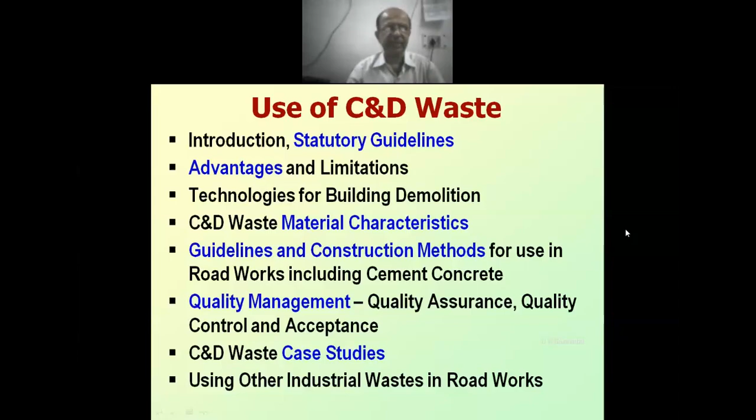Quality management: when we use this C&D waste, what type of quality control tests we have to do, how to ensure that whatever road we have constructed using C&D waste is of very good quality. So those issues will be covered. Then some case studies I will be discussing, and then, as I told, towards the end, some other industrial wastes, etc., which are not being covered in these presentations. So that I will be discussing.

Now coming to the first point, importance of using waste and locally available marginal materials, including C&D waste. Of course, there are these two terms. One is waste material, and another is locally available or marginal material. Waste material we normally refer to industrial waste. There are agricultural wastes also, like rice husk ash. That also has been tried as surkhi, as a lime replacement material. But of course, the quantum of generation is not so much as compared to industrial waste materials.

So C&D is also an industrial waste material because construction is also an industry. Many times we say construction industry, road construction industry. So that is also an industry. The waste material produced by any industry, the reject material produced by any industry, is called waste material. And locally available mainly refers to materials which don't have very acceptable properties with regard to road construction. That's the difference between waste and locally available material. But many a times we use them as synonyms, and many a times both will be the same also.

But for example, laterite is there, or slate stone is there. Laterite is available in plenty in coastal areas. This is a softer type of aggregate material. Slate is not very soft; slate is a very hard stone. But the problem with slate is that it comes in layers, so its flakiness index will be very high. So those things are considered locally available or marginal materials, which are naturally available. But waste is definitely a byproduct or reject material of an industry. So C&D is also a waste material.

At least for fly ash, right now we have very good estimates of how much is produced, and for steel slag, copper slag and other types of industrial waste also, because those are generated by specific industries. So if we ask the industries, they will be able to give the data, and that data is collected and collated and summarized, and we can calculate the total generation of fly ash or steel slag or whatever type of industrial waste is there countrywide.

But unfortunately, construction industry is very spread out, spread out all over the area. Who is demolishing his building today and who will demolish tomorrow, that is not sure. Municipal authorities will be knowing, but exactly even they don't have the exact data regarding the C&D waste. So that is the problem, and countrywide, how much of this C&D waste is generated, we don't have - only estimates are there.

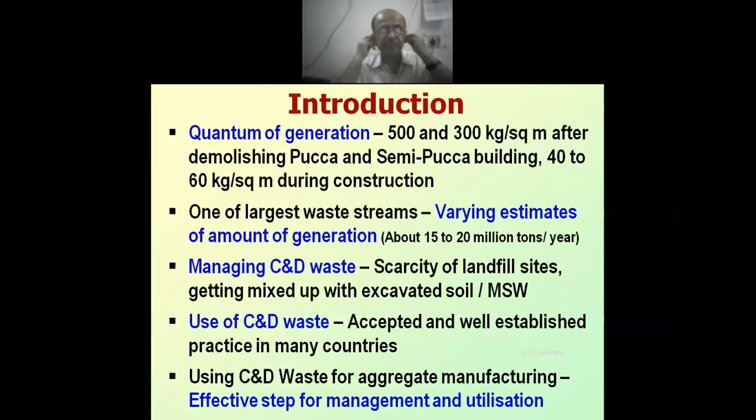Now, how much per year all over India is generated? There are different estimates. One estimate I have written here. In Delhi, around 3 to 4,000 tons per day is generated, that's what they calculated.

Managing C&D waste, you can refer to the CPCB and other guidelines. They will give approximate estimates of C&D waste. Managing C&D waste involves addressing the scarcity of landfill sites in many countries.

Actually, unfortunately in our country, not only C&D waste, using any waste material in road works or building works is not immediately accepted. As soon as you suggest to use fly ash, slag, or C&D waste, the PIO or the concerned engineer will say, what is this? How did we construct it before? How will our road be of good quality? Why are you forcing us to use this kind of material? These kinds of questions will arise. This is very unfortunate, actually.

Otherwise, if we look worldwide, even the advanced countries of Europe and America, it is already an established practice to use this kind of byproduct. They don't call it waste material at all, they call it industrial byproduct material. We can consider the European countries as world leaders for using this kind of waste or byproduct material, including C&D waste. Using C&D waste for aggregate manufacturing is an effective step for its management and utilization.

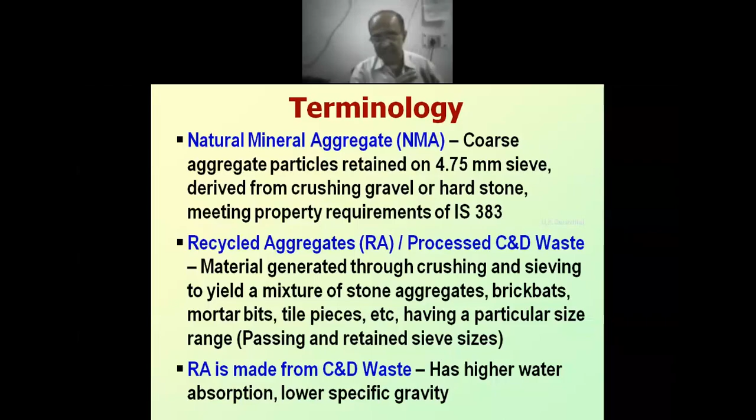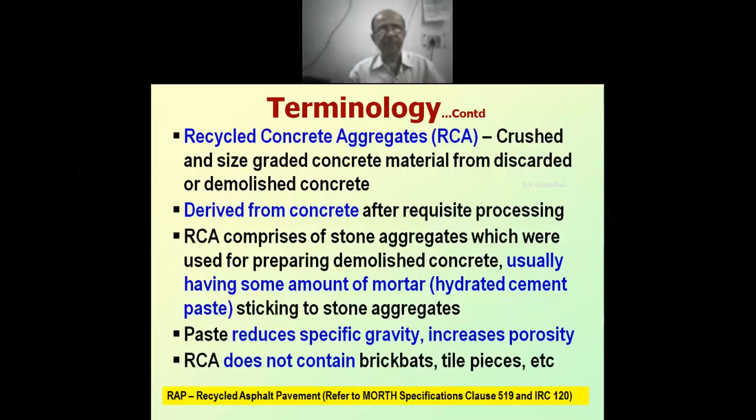Now coming to statutory guidelines, what do our statutory guidelines say regarding the use of C&D waste? The C&D Waste Management Rules 2016, issued by the Ministry of Environment, Forest and Climate Change, Government of India, vide notification dated March 2016. I told you about the earlier gazette notification, which was issued way back in the 1990s.

Then of course the revised versions also have come. These C&D waste guidelines were notified; it is called the C&D Waste Management Rules 2016. It was notified in 2016. So the application is waste resulting from construction, remodeling, repair and demolition of any civil structure generating C&D waste. So these guidelines are applicable to all those places where C&D waste is generated.

So what does this guideline mainly contain? It tells with regard to bulk generators and municipal authorities what their obligations are, in what way, what they are supposed to do. Duties of the bulk waste generator. Bulk waste generator means bulk C&D generator, more than 20 tons per day.

So if you are constructing a small residential building, this is not applicable. Only when buildings are demolished and this much amount of waste is generated per day, this is per building and this is per project. So then only it is termed as bulk waste generator. If he is not a bulk waste generator, what should he do? The guidelines say that he must take that C&D waste and deposit it in designated C&D collection points.

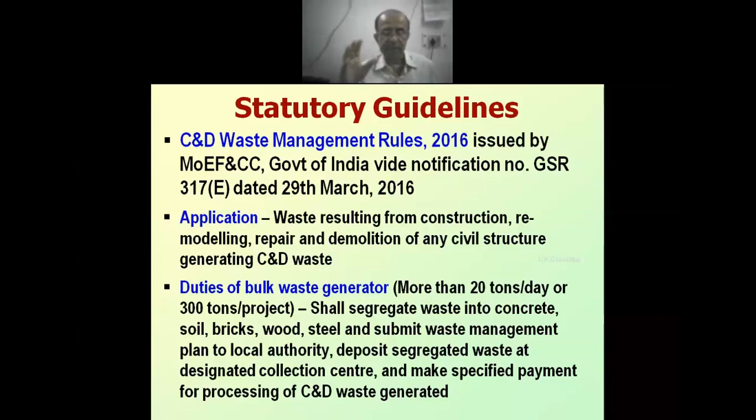And then whatever material remains after reusing, he should submit it to the designated authorities. And of course, the authorities will charge for collecting his waste material and processing it, so he has to make that payment. Now, what are the obligations of the local authorities? The local authorities shall get the waste from the collection center, transport it for processing, devise measures for management of C&D waste, including processing facility, provide incentives for using the material from C&D waste such as non-structural concrete, paving blocks, lower layers of the road pavement, colony and rural roads.

So the authorities are obliged to have some methodology for collecting, transporting and processing this C&D waste collected at the collection center, and then they should set up the processing plants. And not only processing and making reusable articles, they must subsidize. They themselves must use those kinds of products: non-structural concrete, paving blocks, and roadworks also. That means municipalities who are constructing the roads are obliged to use the C&D waste generated in that municipality in their roadworks.

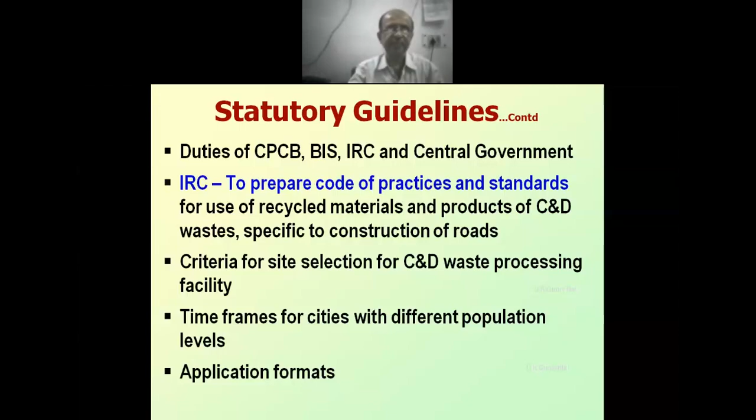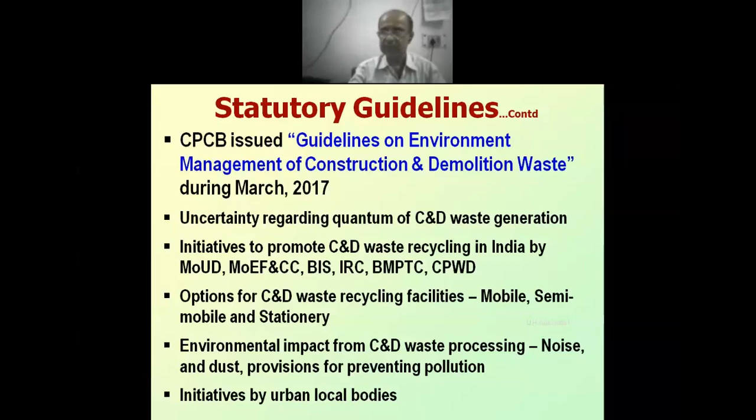In what way? Actually, people demolish a building and they will not know where to dump it, because you just cannot dump it in the municipal solid waste (MSW) dustbins. So what do they do? They fill up the truck. They wait till night. So during the night, they go just like thieves.

They will be looking for where they can dump that C&D waste, and mostly it will be in the vacant plots where buildings have not been constructed as yet. It will be filled up with C&D waste. City outskirts, roadside. This is also another very big, very problematic area.

You are hearing about urban flooding. Since the last few years, we are hearing about urban flooding. Urban flooding was there in Mumbai, on a very large scale, and very unfortunate. It happened a few years back. Then urban flooding was there in Chennai, and now urban flooding has happened in Bangalore. We are all seeing those videos in newspapers and the like.

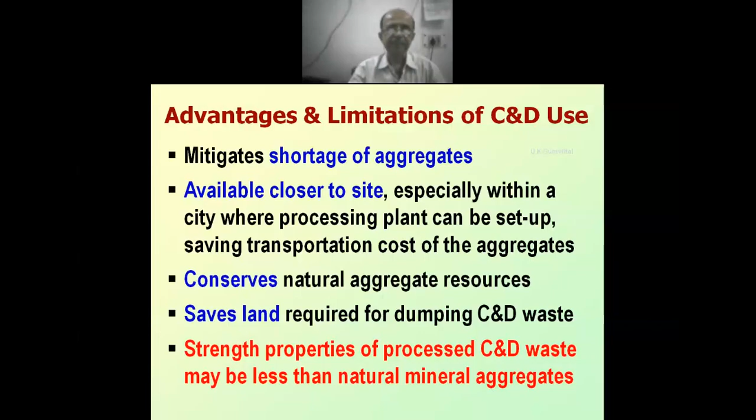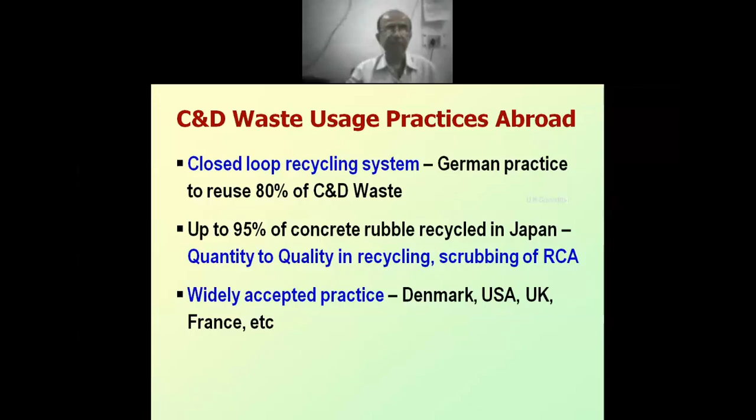It's a widely accepted practice in many countries in Europe and America, like Denmark, USA, UK, France, etc. The international specification, the European code EN 12620, allows recycled aggregates in concrete, recycled aggregates being processing of inorganic material previously used in construction. RCA can be up to 90% and RA can be up to 50% in concrete.

So RCA and RA are entirely different terms. I already told you RCA is derived exclusively by crushing concrete. RA is derived by crushing C&D waste. That means RA can have concrete, brick bats, tile pieces, etc. So that's why RA will be more heterogeneous and can be used up to 50% replacement, whereas RCA can be used up to 90% replacement of natural mineral aggregate as per EN 12620. Even we don't allow that much. What does BS 8500, the British code, say?

RCA can be used in structural concrete having compressive strength up to 50 MPa. Up to 50 MPa concrete we can use RCA. Mortar to be less than 5% in RCA. If the mortar is more, usage is limited to 20%. No limits for the mortar content in RA. Of course, RA we cannot use in very high strength concrete. RA we can use in the mass concreting or concrete having a lower strength.

And the extent of use of RCA also depends upon the amount of coating. That of course you will have to judge visually. If the amount of coating is more, we can use up to 20%. Otherwise, the code DIN 1045, what does it say? It says that up to 25% RCA can be used in this German code. Up to 25% RCA can be used in structural concrete of strength up to 30 MPa in the dry or low humidity condition.

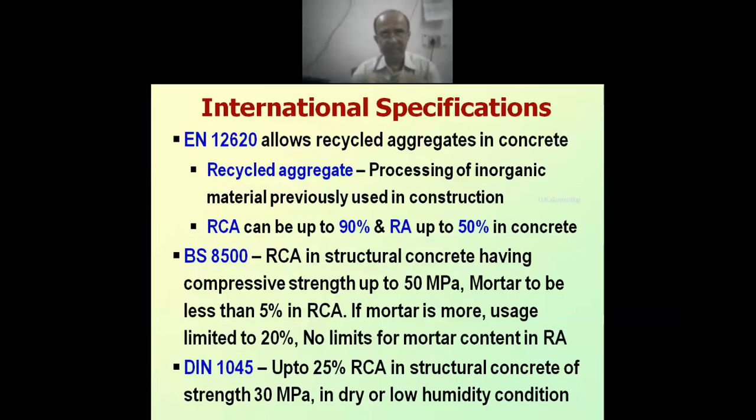And in such conditions, we can use RCA up to 25% in up to 30 MPa concrete. That's what they have specified. Because if you use RCA, the RCA will have a higher water absorption capacity. So if it is used in a humid condition, it will absorb more water, and more water means more degradation of the concrete. So that's the idea.

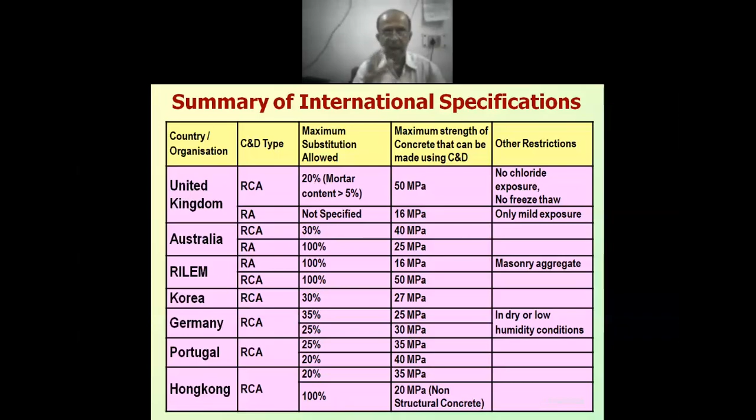Now, coming to some important points with regard to demolition technologies. What is demolition? Demolition is destruction, breaking down, dismantling, destroying a structure after its service life by pre-planned and controlled methods. This is very important. Whatever structure we construct has a particular service life. A flexible pavement usually will have a service life of 10 to 15 years, and cement concrete pavement maybe 25, 30 years.

In a similar manner, a building may have a service life of 50 years, 70 years. Of course, there are buildings which are centuries old and still people are using them and they are in good condition. That's a different aspect. But normally, the building life is considered about 70 years or a maximum of 100 years. After that service life is over, either we go for major rehabilitation of that building, or many times we demolish that building and construct a new one. So this demolition, as we already know, results in C&D waste generation.

Demolition can be done by two methods. One is manual demolition, which is a widely used technique. It's labor based.

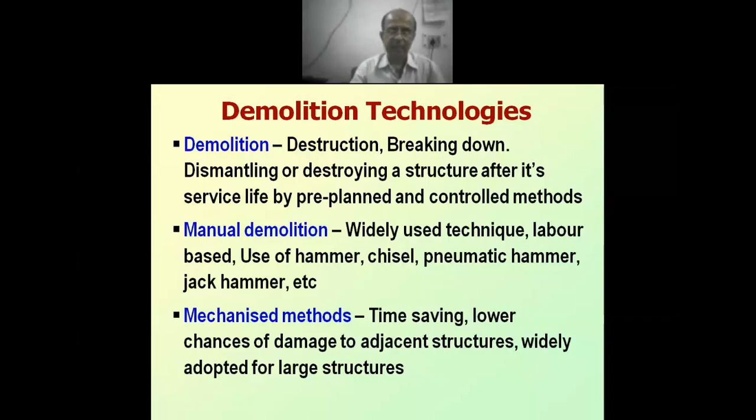there we adopt mechanized methods. So what are these mechanized methods? The first and foremost is the wrecking ball. It's an iron ball, hung from a crane.

When the crane swings, it swings in such a manner that the ball hits the building with great force, just like a hammer, but a very big hammer. So it hits the building and the building is demolished.

The ball, weighing up to 6 tons, is suspended from the crane and either dropped or swung into the structure, crushing the building. The ball weight can be up to 6 tons, suspended from the crane, and it can either be dropped or swung so that it hits the building and demolishes or crushes it.

The disadvantage is straightforward: a highly skilled operator is a must, because the ball is usually used by swinging. During that swinging, when it goes back, it should not hit other buildings. And even when it is hitting the intended building, it must hit with a particular force. That force should not be very high.

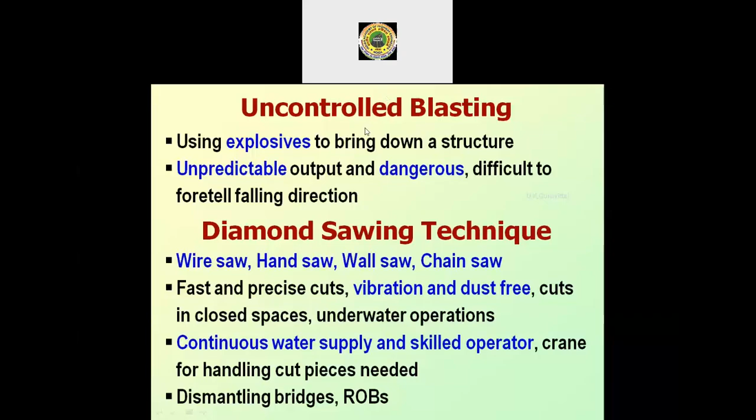Hope you are all there, now you have come back. So we were discussing the use of C&D waste and the different demolition methods. I will continue with the properties of C&D waste, the other demolition methods, in what way this material can be used, and the case studies.

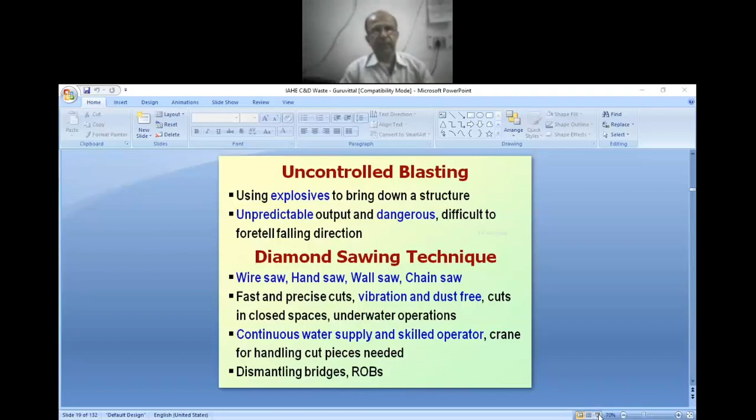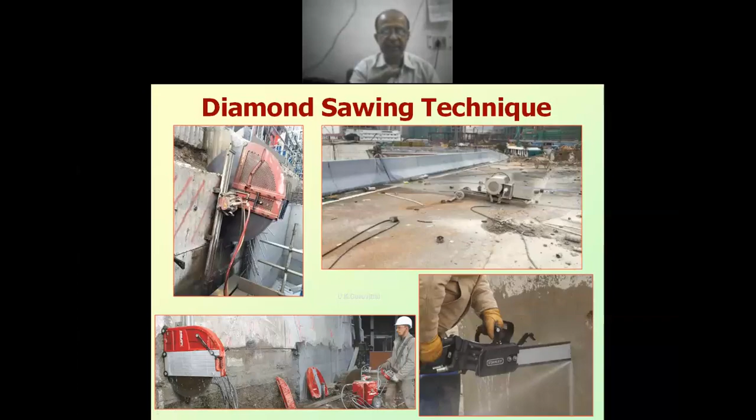This is the diamond sawing technique using hand sawing. These are smaller ones, and this is a little bit bigger one. They are sawing off, cutting off the bridge structure like that. So this is a very versatile equipment, but the only problem is that it requires a continuous water supply.

Now, the next important technique is implosion. Everyone in India would be aware of implosion because of what they did to the Supertech Twin Towers in Noida. Very tall structures were there, and using this implosion technique, they brought down that entire structure within seconds, within 9 seconds. What is implosion? Implosion is using explosives to knock down the columns so that the building collapses, done by the Firm for Controlled Demolition Inc. of USA.

This has been widely discussed in the press and TV. The columns are demolished in a systematic, controlled manner, one by one, by tying explosives, maybe TNT or dynamite. TNT is the usual one they use. The sequencing of the blasting is calculated and decided so that the building collapses within itself. That is known as implosion. Placement of explosives and sequence of detonation are critical. The building is demolished in a few seconds. It is suited for high-rise buildings, and the fall and scatter of debris is controlled. The two towers were very nearby, just 9 meters away, and the other tower suffered absolutely no harm, except for the dust.

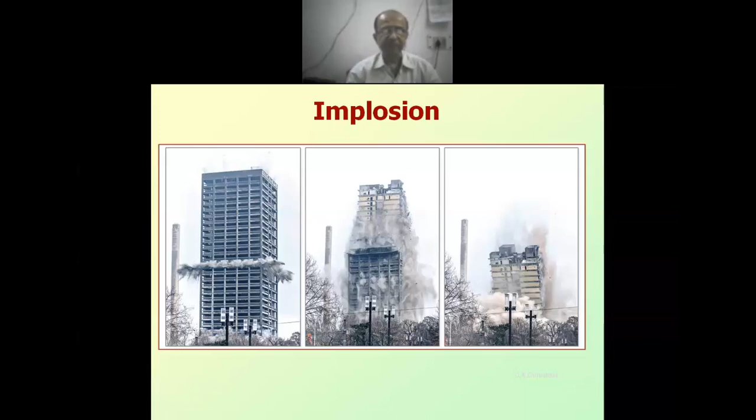So here are some photographs of the implosion of other buildings. This also will be very quick. Not only the Supertech towers, it happened earlier also in Cochin, within the coastal regulation zone very near the sea. They had constructed similar kinds of residential building structures, and they were also demolished in the same manner.

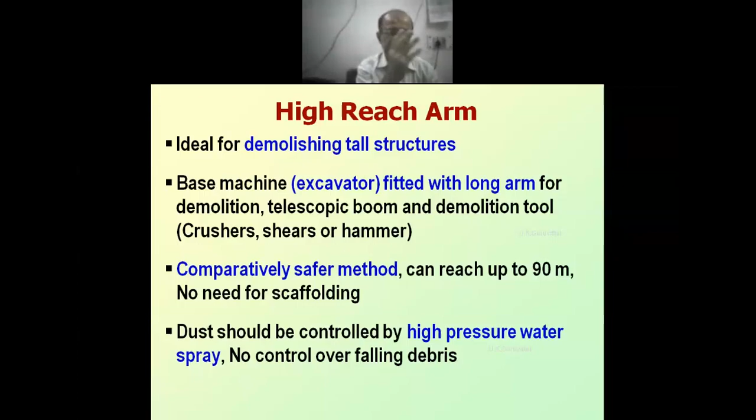The next technique can be a high reach arm, which is ideally suited for demolishing tall structures. This high reach arm has a base machine, an excavator fitted with a long telescopic boom for demolition, and demolition tools can be either a hammer, a crusher, or shears, operated in a similar manner.

It is similar to the swinging ball, but the swinging ball's swing is uncontrolled. This high reach arm is very much under the control of the operator. Since there is no swinging ball, it is a comparatively safer method and can reach up to 90 meters.

No need for scaffolding. Dust should be controlled by high pressure water spray. There is no control over falling debris, which can fall a little bit away also, so that is the problem. Of course, dust nuisance will always be there. So this is the high reach arm.

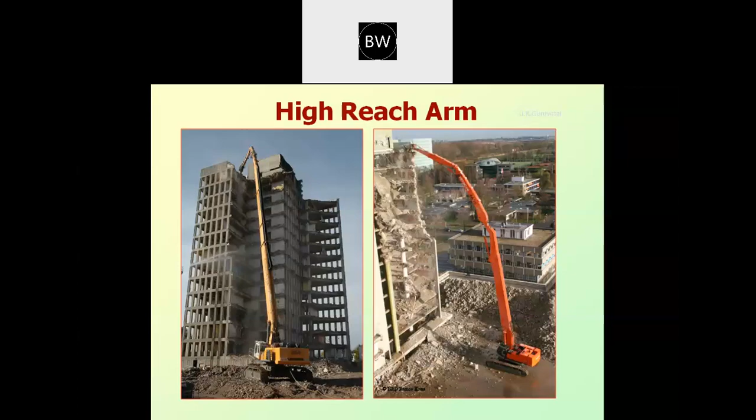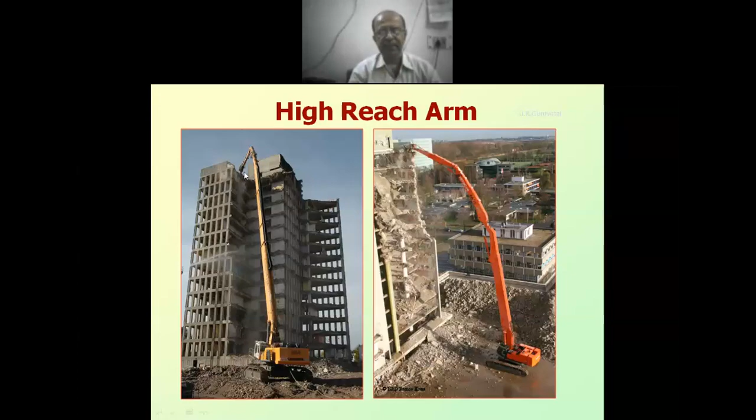So this high reach arm, you can see in the photographs, is having the base crawler. Then to that they have attached either a hammer type or a shear type attachment, like that.

Concrete crushers and bursters operate by applying pressure. It can be used for small jobs in narrow, inaccessible areas. It cannot cut steel rods and needs water spraying. Not suitable for tall buildings, and it has low output.

Then hydraulic splitters can also be used exclusively for cutting concrete. The burster is similar to this splitter.

Then coming to pavement breakers and rubbleizers, I already told you with regard to RAP, which is exclusively for asphaltic or bituminous pavement. But in many places, we have cement concrete pavement also. Cement concrete has a longer life, 40 to 50 years. After that, if it is too much under distress, we may not be able to provide an overlay over that, and it has to be demolished, broken down. So what type of equipment can be used?

Specialized machineries are there for breaking cement concrete pavement. For bituminous pavement, it is called the milling machine. For cement concrete pavement, it can be either a falling weight impact breaker or a resonant rubbleizer. These operate on different principles. The falling weight impact breaker, as the name shows, operates by dropping a weight, and the resonant rubbleizer operates by vibrations or resonance.

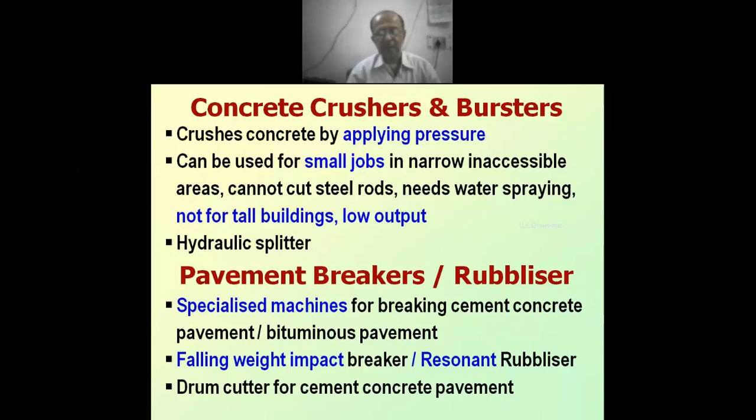Normally, I have not seen this kind of equipment in our country, because cement concrete pavements are also not very widely used here. Only now, because of the 4-laning and 6-laning works, they have constructed a considerable amount of cement concrete pavement, and those pavements have not completed their service life yet. So these are not very popular in India, but abroad they use this kind of equipment.

Now there is another term called deconstruction that is also gaining importance nowadays. One is of course the demolition that we all know, and deconstruction is also gaining importance. What is deconstruction? Deconstruction specifically focuses on recover, reuse, repurpose, and once again, when we make it for a repurpose, we will be reusing, recycling. Instead of reusing it, we can put the word recycling.

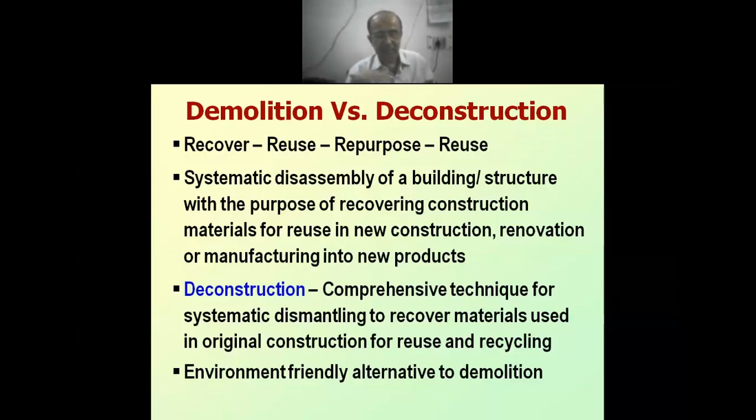When we do demolition, a lot of noise and dust is created. But in deconstruction, we are dismantling it, so a little bit of generation of noise may be there. But at least the dust pollution will be overcome. Deconstruction reduces the waste going to the landfill. It's a sustainable practice, more environment-friendly practice.

First step is to prepare a detailed plan of dismantling. You must carry out a building survey to identify the reusable materials. Then we have to plan the protection of adjacent properties, health and safety considerations, and the top-down method is usually adopted, since deconstruction is nothing but reverse of construction.

So in construction, we start with the foundation and then the plinth. Above the plinth, we build the walls. We will be installing our doors and windows. And once the brick walls are ready, then we go for roofing, RCC roofing and all. Another way, when we are constructing the brick walls, first of all we may construct the columns, and in between the columns we construct the brick walls. So that is the process.

So when we deconstruct it, it will be reversed. First of all, we will remove the roofing, and then we will remove the wall portions, reuse it. We'll remove the column portion, keep it for reuse like that. But already the RCC columns and RCC beams are there. How can we use it? So that is a challenge. That's an R&D aspect that the designer has to solve.

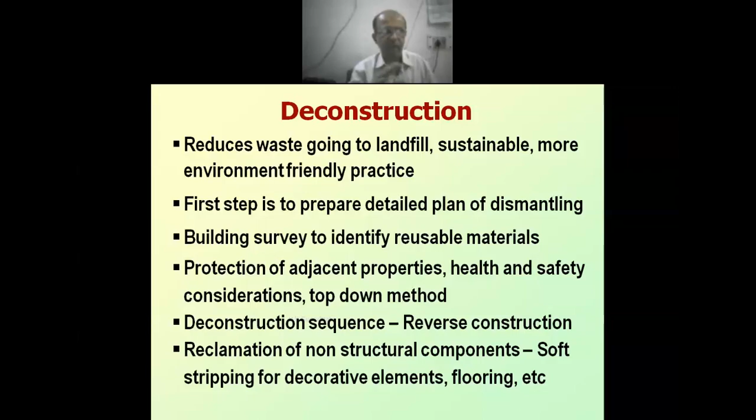So the easiest is the reclamation of non-structural components like decorative elements, flooring, tiles, etc. They can be very easily reclaimed and recycled. So that is called soft stripping. So deconstruction, you can say, is an advanced type of demolition process.

Now let us go to C&D waste material characterization. So what exactly are the different components of C&D waste? Different agencies in our country have carried out various studies and come up with their own conclusions. As per TIFAC, Technology Information Forecasting and Assessment Council, in 2001 they did a study and said that C&D waste is composed of various matter, and their approximate relative percentages are like this.

You see that the masonry or mortar is the maximum and concrete is also considerable. And of course, wood and metals are in negligible amounts. We normally remove that. But the unfortunate part is that soil is almost 1/3 of that, and that's why it makes the entire C&D useless. In 2004, the MCD study was there, similar thing, but they noted that the soil component is even more. IL&FS did a study in 2005.

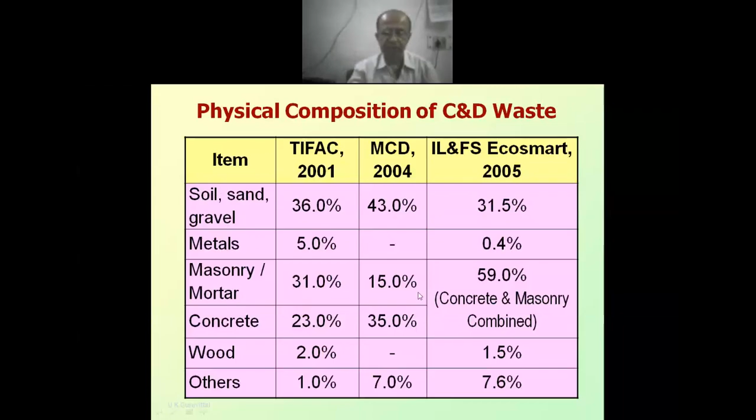The first and foremost thing for using this type of C&D waste will be that we should ensure that this 1/3 of the soil and gravel is not intermixed with this material. And once we have ensured that we are having only the C&D waste, that is the brick and concrete portion, then we have to crush it and sieve it and separate it into different size aggregate portions. So this is what we have done.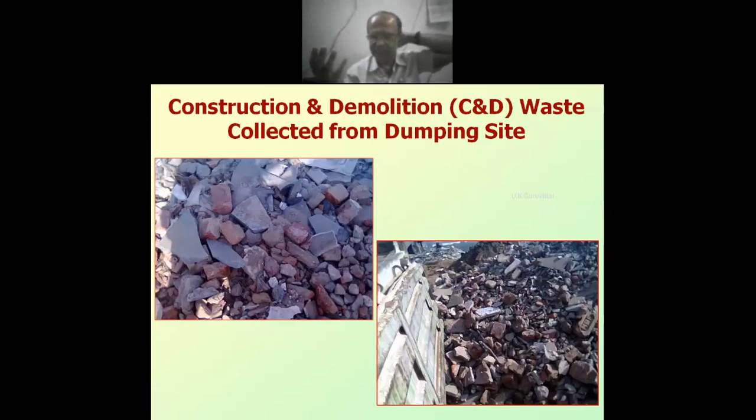So in CRRI, we collected the C&D waste from Delhi C&D waste dumping yards. We took it to the aggregate crushing plant. It's not any specialized crushing plant, just an aggregate crushing plant and aggregate sieving plant. We crushed it and we have separated it into 3 different components. One is the C&D waste aggregates.

So this, you all know, is RA, recycled aggregate. This is not RCA, because you can see this is having brick pieces, this is having tile pieces, etc. So this is not RCA. Stone aggregates are also there, but the brick pieces are also there. So this is RA. And of course, the size of this aggregate is between 20 mm to 6.3 mm.

After this material was crushed and sieved, these were the 3 components which resulted. So this was around 42%, and this was around 30%. So this is a very small size aggregate. We can call it Jeera size aggregate, 6.3 mm nominal size, around 1/3, and another 1/3 of that got powdered during crushing. So how is that powder looking? We can see that. So all the 3 were used in different types of road work materials. And those details, what are the properties of these 3 components, etc., I will be discussing.

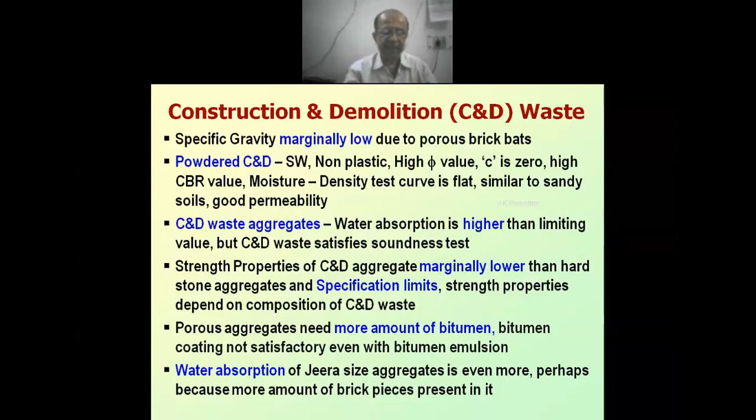Porous aggregates need more bitumen. Bitumen coating is not satisfactory, even with emulsion. When we tested it in a bituminous mix, this is what happened. The porous aggregates absorb some bitumen. So normally if you are using about 5.4, 5.5% bitumen in the bituminous mix, with C&D based aggregate you will use 1 or 2% more, because just as the aggregate can absorb water, it can absorb bitumen also. Water absorption of Jeera size aggregates is even more, perhaps because more brick pieces are present in it, so it will have higher water absorption compared to this.

This is the gradation curve of the three materials I have shown: the C&D waste aggregate, Jeera size aggregate, and powder. This is the powder material, the Jeera size aggregate, and the C&D waste. It is not a well graded material. What happened is that we got the C&D waste material crushed, and then sieved it in the mechanical sieves in the crushing plant itself, passing through some sieve and retained on some sieve.

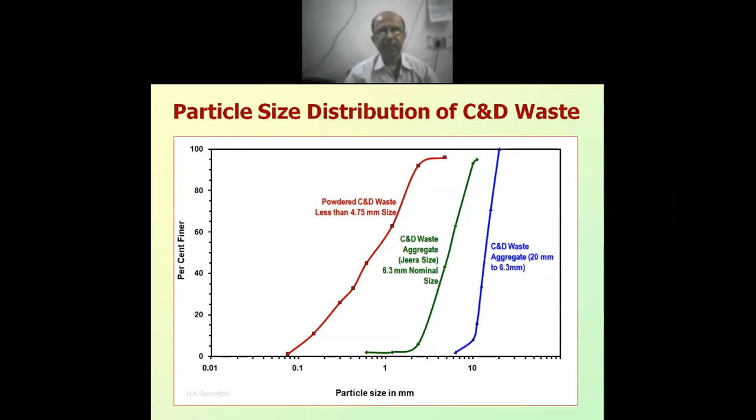So that's why the material is uniformly graded, almost single size. The powdered material, whatever was less than 4.75, is not a very vertical curve. It's a little bit flatter compared to the other two curves. Now coming to physical properties of the C&D waste.

Specific gravity of C&D waste aggregate, if it is more than 6.3 mm size, is around 2.3. If it is less than 6.3 mm size, it is around 2.67. Of course, there are no MORTH limits for specific gravity. Normally, the specific gravity of natural aggregate is around 2.65, 2.67.

If it is a very high strength aggregate, it may have a little bit higher specific gravity. If it has more iron, then its specific gravity will be a little more, maybe 2.8, 2.9 sometimes. But normally aggregates like quartzite, granite, etc., have a specific gravity around 2.65, 2.67. But this material has 2.3 and 2.67 depending upon its size.

That is because the 6.3 mm size has more brick bats. The brick bats are porous, so that's why they bring down the specific gravity. Whereas if you go to the smaller size aggregate, the brick bats get crushed. They become powder, so the porosity will be lower. That's why the specific gravity improves.

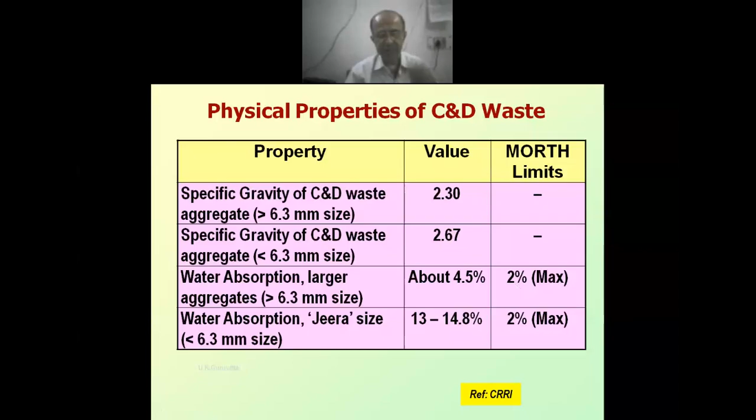The water absorption for bigger size aggregate is around 4.5%, which is more than the 2% maximum in the MORTH limit. Smaller size aggregate, as I already told you, will absorb even more water. Then the engineering properties of the C&D waste aggregate, 20 to 6.3 mm size: unit weight in loose state and compacted state, 12.55 and 16.18 kN/m³. There are no MORTH limits for that.

Now this 33% satisfies the sub base AIV. So this material can definitely be easily used in the sub base layer, GSB layer, provided the gradation requirements are also met. I already told you this is a non-plastic material. So it is non-plastic and has the requisite AIV value. We should see that it meets the gradation limits, then we can very easily use it in the sub base layer.

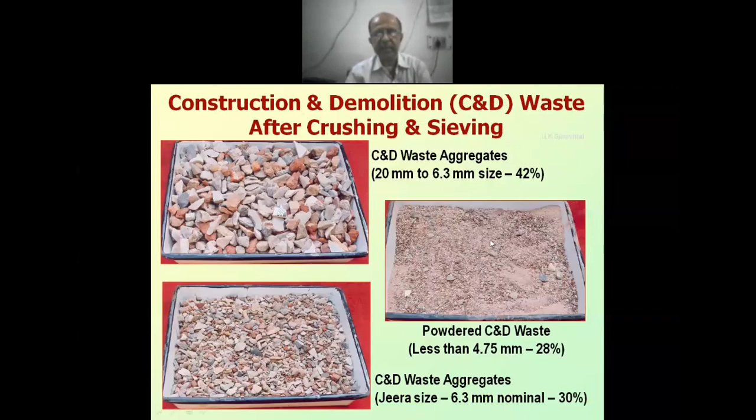Engineering properties of the C&D waste finer than 6.3 mm size, the powdered material. What are the engineering properties of this one? Modified Proctor compaction test: MDD 19.3 kilonewton per meter cube, OMC 10.5%. With standard Proctor compaction, it is 17.5 and 12.5%. CBR value is very high, 74%. So it is a very good material for GSB.

Direct shear test: 45 degrees is the phi value. It's a very coarse material, so that's why the phi value is very high. And C is 6 kilonewton per meter square. Normally C is neglected. C&D waste may have a phi value varying between 38 and 51 degrees. However, a limiting value of 40 degrees may be considered for the angle of internal friction during embankment design.

So if we use this type of C&D borrowed material for embankment construction, it may have a very high value, but the IRC code says that the phi value for the design of the embankment side slopes must be limited to 40 degrees, as a precaution.

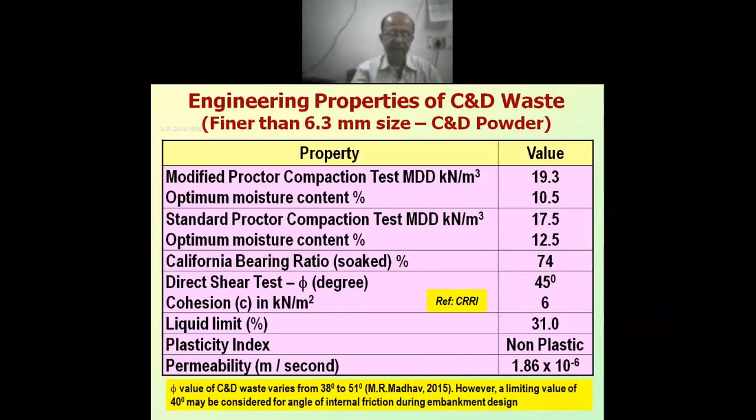Properties of the aggregates from Haryana PWD, who tested RCA. Whatever properties I have given here are all for RA. Wherever I tested RCA, that also I have indicated, but this particular data is exclusively for RCA.

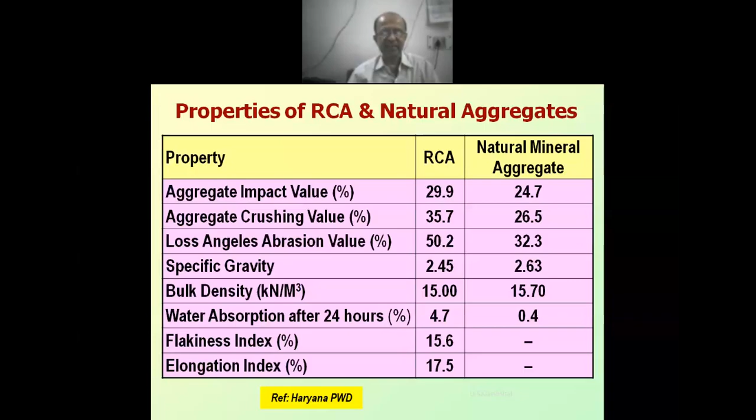They were demolishing some structures, and from that they calculated aggregate impact value around 30%. They have also given the natural mineral aggregate properties. Crushing value around 35%, Los Angeles abrasion value around 50%, specific gravity around 2.45, bulk density around 15 kilonewton per meter cube, water absorption once again very high at 4.7%, and it's okay. Elongation and flakiness index are okay.

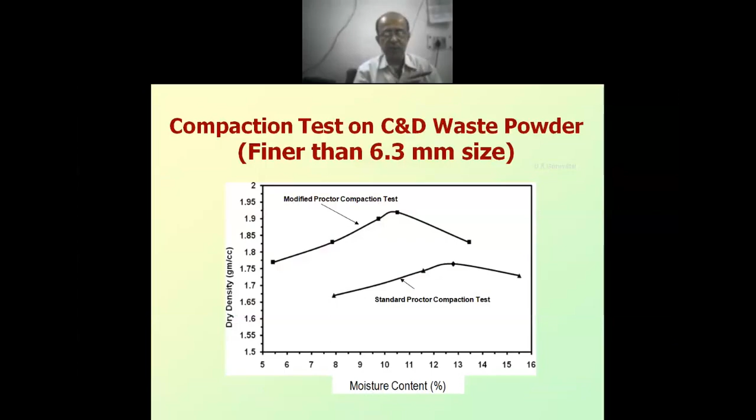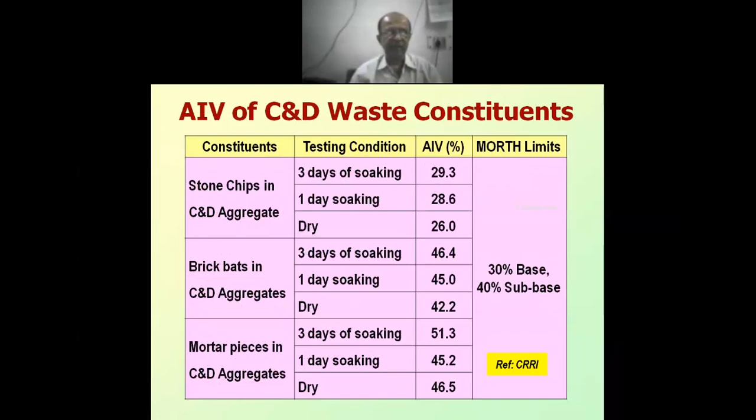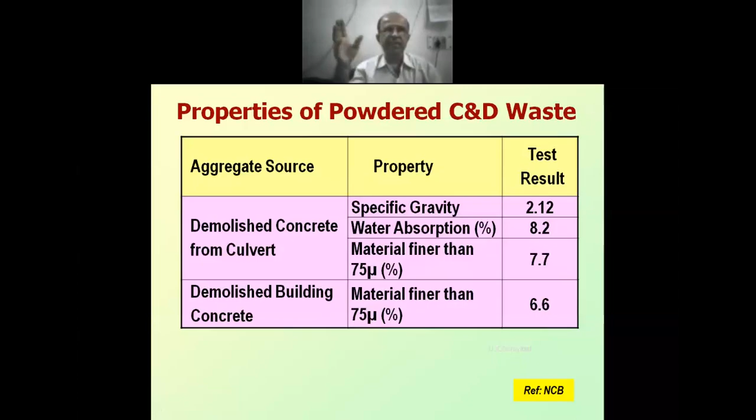Properties of powdered C&D waste: specific gravity 2.12, water absorption 8%, and material finer than 75 microns is not very high - this is also another important property. Because material finer than 75 micron is not very high, the permeability of this material will be very good. That is why this material can be easily used in GSB.

Physical and engineering properties of RCA as reported by Dr. Lakshmy Parameswaran: water absorption up to 7%, bulk density around 11.5 to 14.4 kilonewton per meter cube, specific gravity around 2.32 to 2.56, aggregate crushing value about 18 to 36%, aggregate impact value around 10% to 38%. This shows how heterogeneous the material is.

You can see the AIV value very low, 10%, meaning it's as good as a very high strength stone aggregate - like very good quality unweathered quartzite rock, granite rock, or basaltic rock. Basalt is a very strong stone, mainly available in Western India like Maharashtra, Gujarat, etc., and it's black in color. It has very high strength, meaning a very low AIV value, around 9-10% for basalt.

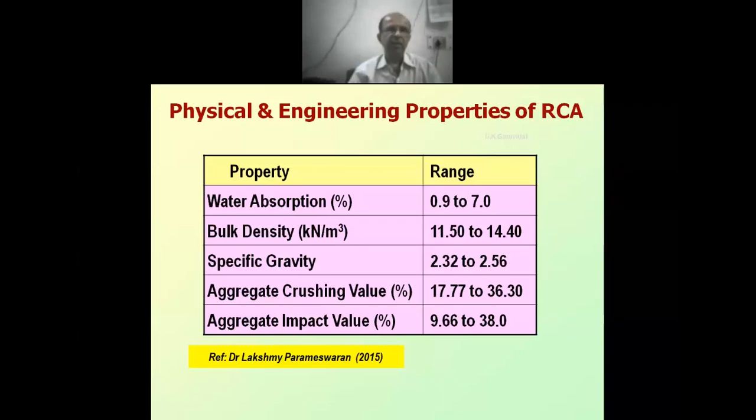But since RCA is a heterogeneous material with a coating of mortar, its strength value will come down because it absorbs water. How much coating of mortar is there is also very important - if the mortar coating is very high, AIV will increase; if the mortar coating is lesser, AIV will come down.

Now, coming to what the IRC guidelines and IS guidelines say with regard to guidelines and construction methods using C&D waste in embankment, GSB, bound sub-base and base courses, and cement concrete pavement. So I have taken these from the guidelines: One is MORTH specification for road and bridge works, fifth revision, published in 2013. MORTH specification for rural roads, first revision, published in 2014. And this is IRC 121, guidelines for use of construction and demolition waste in the road sector, published in 2017. Then IS 383, which is coarse and fine aggregate for concrete, was also revised and published in 2016.

So all these specifications have provision for using C&D waste. MORTH specification, MORD specification, IRC 121, as well as IS 383 - they have provision for using C&D waste in the road sector in different ways.

First of all, what do they say regarding the processing of C&D waste? This is from IRC 121. C&D waste is to be collected separately, with no mixing - meaning the soil particles, soil material, should not be mixed with the building chunks. Processing of C&D waste comprises crushing and grading, crushing and sieving, required to obtain the desired aggregate grading. Workers are to have safety gears to safeguard against sharp-edged glass, ceramic, and metal pieces. Crushing converts big size chunks to the desired gradation, with resizing and sieving in mechanical sieves to obtain the required gradation. Manual crushing is for small jobs only.

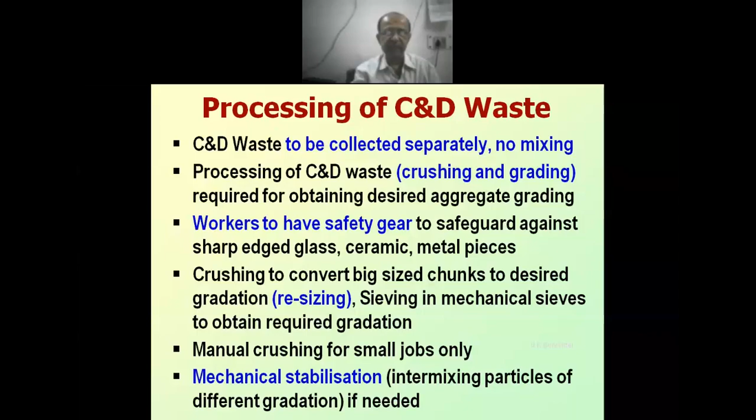So when we process this C&D waste, all these steps are involved: we crush the big chunks into desired sizes, sieve it to obtain uniform sizes, and then remix it. We can crush and use it without separating and remixing, but the crushing process must be so well controlled that the requisite gradation is obtained - that would be very difficult. So normally they crush it, sieve it and separate it out, then take out the required quantities - one third of this, one third of that, one third of the other, in three different sizes - and mix them, say 20%, 40%, and another 40%, whatever the requisite percentage is required.

Now moving to embankment construction - what does the IRC code say regarding embankment construction using C&D waste? C&D waste fulfills the MORTH and MORD specifications with regard to density and plasticity of the fill material. This C&D waste, as I already told you, is a non-plastic material, so plasticity properties you need not worry about. The liquid limit is also a little bit higher, but well within the specified limits, either 50% or 70%, whatever the LL limits are.

The C&D waste is to be crushed to a size less than 75 mm particles and used in the core of the embankment - I'll show you some drawings that will make this clear. Whatever the crushing process, it should ensure that the maximum particle size is less than 75 mm.

C&D waste is non-plastic, prone to erosion, and may not support vegetation growth. So how do we deal with this? That is overcome by providing about 0.5 to 2 meter thickness of earth cover on the side slope as well as on the top, depending upon the embankment height. If the embankment height is lower - 1 meter or 1.5 meters - 0.5 meter will suffice. If it is more, 3, 4, 5 meters or even higher, we provide a thicker earth cover. The reason is simple: higher the embankment, more will be the runoff water.

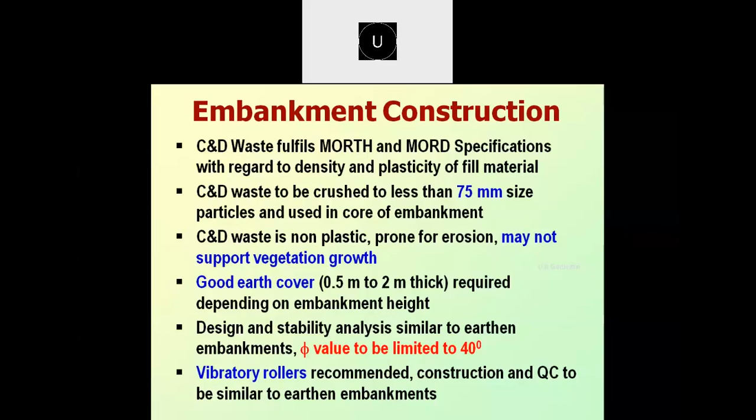This phi value, I already told you, can be very high, but that high phi value is not used in the design. Normally the embankment design we do by using software. Nowadays we don't do manual methods, we use software like Geo4, Geo5 - many softwares are there. So in that software, whatever phi value you give as input, it should be limited to 40 degrees, even though your experimental phi value may be higher. That is because of the reason that...

Since it's a non-plastic material, we use vibratory rollers. Nowadays many types even the pad foot roller comes as a vibratory roller. Previously we had the notion that the pad roller is useful for compacting clay soil because it has a kind of kneading action and compacts clay soil very well. But now pad foot rollers come with vibration also. 50-ton vibratory pad foot rollers are there, used for compacting FDR, full depth reclamation pavement. A 20-ton pad foot vibratory roller will be very useful even for compacting this C&D waste embankment also.

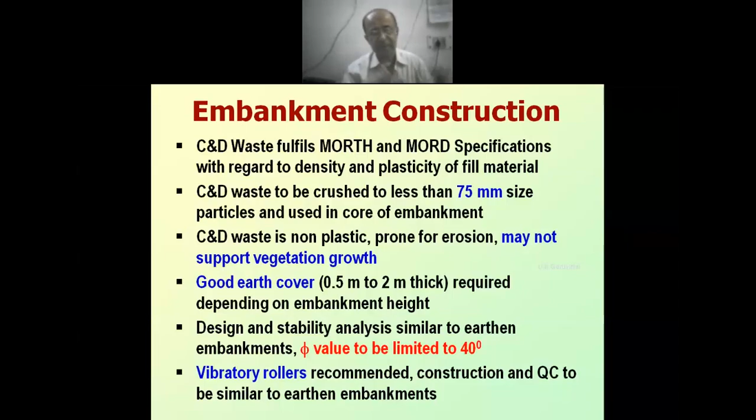Actually, for compacting the C&D waste, municipal MSW compactors are also there - they are a traveler type compactor. So this type of very heavy 20-ton roller, vibratory, is preferable, so that they can compact the C&D waste in an effective manner.

What are the different steps involved in embankment construction using C&D? Clearing and grubbing existing ground before the embankment construction. C&D waste material to be tipped, spread and leveled to the required dimensions, earth cover to be laid at the same time, and water to be sprinkled, mixed using a disc harrow. Whatever cover soil is there, and whatever the core of the embankment being constructed using C&D waste, both should be laid simultaneously and compacted simultaneously. The rolling starts from the ends and moves towards the center - that's the normal process. Towards the center, the C&D waste will be there, and at the outer edges, the earth cover will be there.

What should be the thickness of the earth cover? 0.5 to 2 meters, depending upon our design, depending upon the height of the embankment. Water content to be OMC plus 1 to OMC minus 2%. Due to the porous nature, slightly higher water may be required, because the brickbats may absorb water.

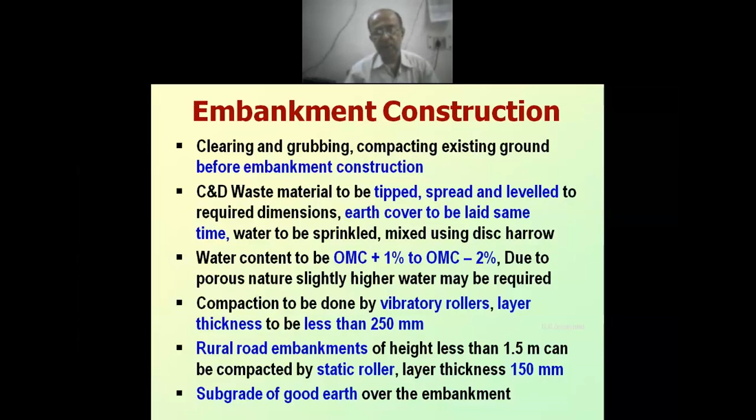Compaction to be done using vibratory roller, layer thickness to be less than 250 mm. Rural road embankment height less than 1.5 meter can be compacted using a static roller also, but we have to use a lower lift thickness. The subgrade of good earth over the embankment is required. Subgrade thickness is 50 centimeter for highway work and 30 centimeter for rural road work - that will be same, and the subgrade is to be constructed using good earth.

This is the cross section or schematic view of a C&D waste embankment. C&D waste will be used in the core, center of the embankment, and it will be protected by a good earth cover on the sides as well as on the top. This earth cover, as I told you, is 0.5 to 2 meters thickness depending upon the height of the embankment. And if the height of the embankment is more, we can go for intermediate soil layers also.

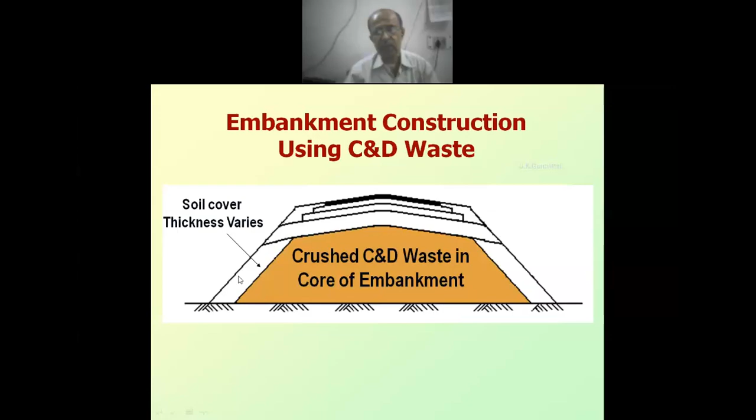So this cross section of the embankment is very much similar to the embankment you would have seen when Dr. Vasant presented the fly ash embankment. Fly ash is also a similar material. It is also non-cohesive and non-plastic. So here also the material is non-cohesive, non-plastic, so we use a similar type of design for the embankment construction. The core or center of the embankment is constructed using C&D waste, with earth cover on the sides and on the top also.

Now, GSB construction using RCA. How do we construct GSB? We follow the MoRTH specification clause 405. It says that crushed cement concrete subbase can be adopted. This clause 405 is for using the C&D waste alone as a GSB material, and it is with regard to using crushed cement concrete subbase. As per this clause, we cannot use RA; it restricts the use to RCA.

But if we follow clause 401 for the GSB material in the MoRTH, in that 401 we can use the RA also. But let us first see what 405 says. The crushed concrete gradation must be as per WBM G2 or G3 grading, with compacted layer thickness to be 75 mm. Each layer should be 75 mm. So let us say we need a GSB layer thickness of 200 mm. Then we can go for 75, 75, 50, or two 75 mm layers of this RCA and then another 50 mm thick moorum layer, depending upon whatever materials are available.

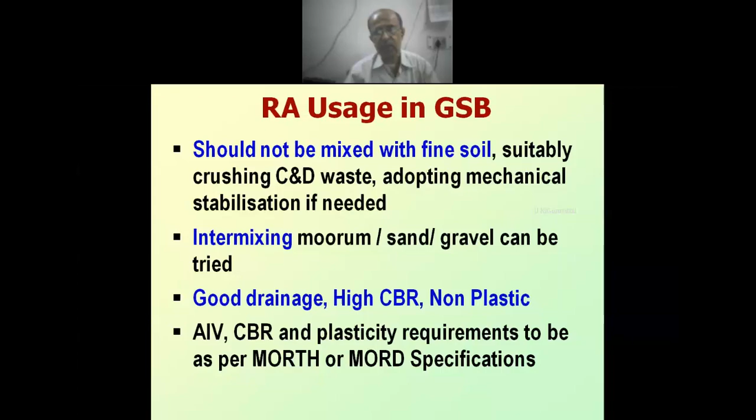This material is of course definitely non-plastic, unless some clay material is unfortunately intermixed with this C&D waste. It will be non-plastic, and its AIV will usually be less than 40%. 40% is for MoRTH specification. If you follow the MoRD rural road specification, the AIV limit is 50% for the sub-base layer and 40% for the base course layer. So C&D waste can definitely be used in the base course also as per the MoRD specification for rural roads.

And GSB mix design, how do we do that? I have shown a trial and error method using an Excel sheet. There are three materials: Jeera, aggregate, and this powder material, and how much of each you mix, and checking against GSB grading 6 as per MoRTH which one fulfills the requirement. This is one way. Another way is also using Excel; you can calculate it.

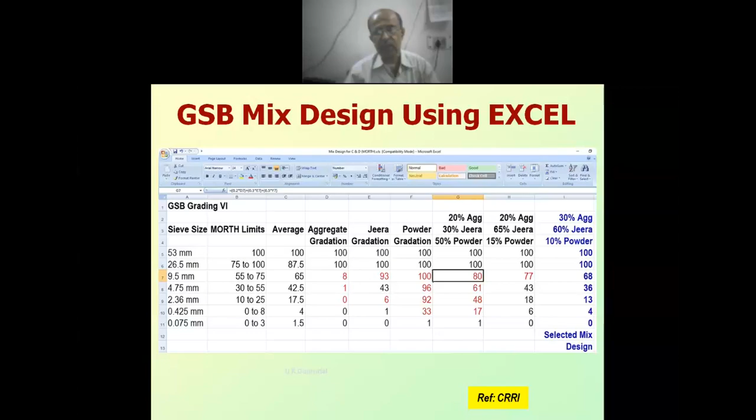Normally, WBM or WMM is considered to have a CBR value of 100%. Naturally available material having a CBR value of more than 80% can be used in the base course layer; the MoRD specification states that a mixture of soil and aggregate with CBR more than 80% can be used as base course soil aggregate mix. So this C&D waste also has a very high CBR value. As a GSB you can definitely use it, and even as a base course in rural roads.

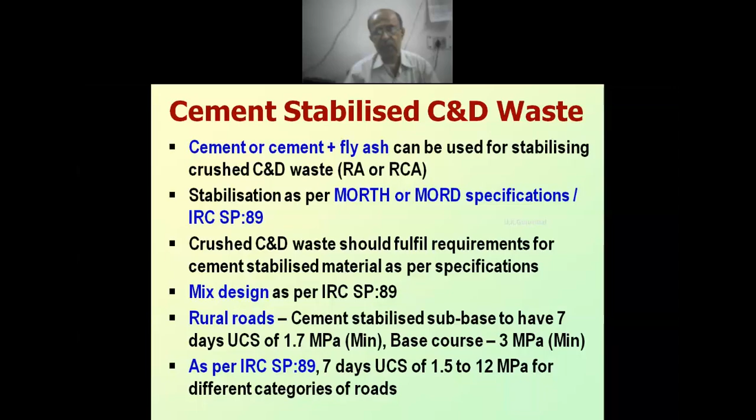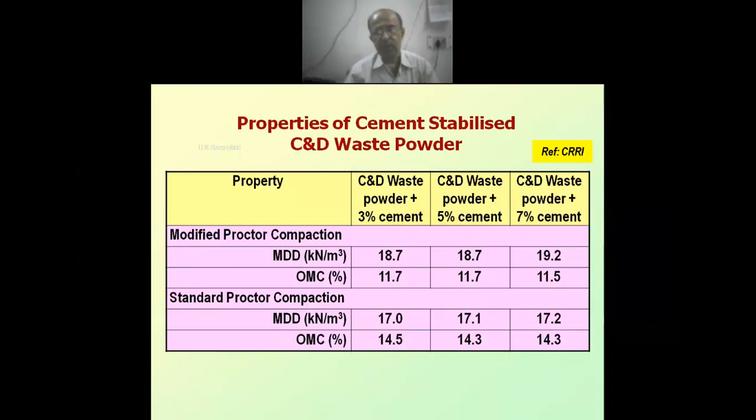In the same manner, this C&D waste also we can stabilize by using some cement, and if it attains 1.7 MPa or 3 MPa, we can use it in the subbase or base course of rural roads. If it attains about 4.5 MPa or 6 MPa, we can use it even for highways as a base course. So we did some studies. These are the results of 3%, 5% and 7% cement addition.

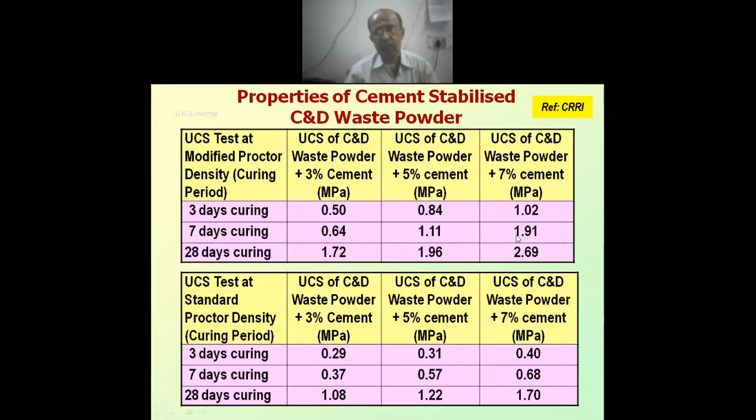Let's see the Proctor test, and what are the unconfined compressive strength values. This is 1.9 MPa. So we require around 6% cement for the subbase layer, and for base course, of course, it's not very high. This is when we use C&D waste powder. If we add the C&D waste aggregate also, these values will get higher. This is totally for the powder type of material.

Now coming to what IS 383 says with regard to percentage replacement of natural mineral aggregate, NMA. It depends on the type of your concrete, whether you are using PCC, plain cement concrete, or RCC, or lean concrete, less than M15 grade. Lean concrete you use for the base course below the PQC. So C&D waste type RCA, recycled concrete aggregate, can be 25% maximum in PCC and 20% maximum in RCC. And in lean concrete, we can use 100%.

RAA is not advocated for either PCC or RCC, but in lean concrete, we can use it. As a fine aggregate, RCA percentage is 25, 20, and 100%. So we can use C&D waste either as a fine aggregate or a coarse aggregate in cement concrete works, but Indian codes restrict the usage below M25 grade. Compared to the British and European codes, this is very much conservative, you can say.

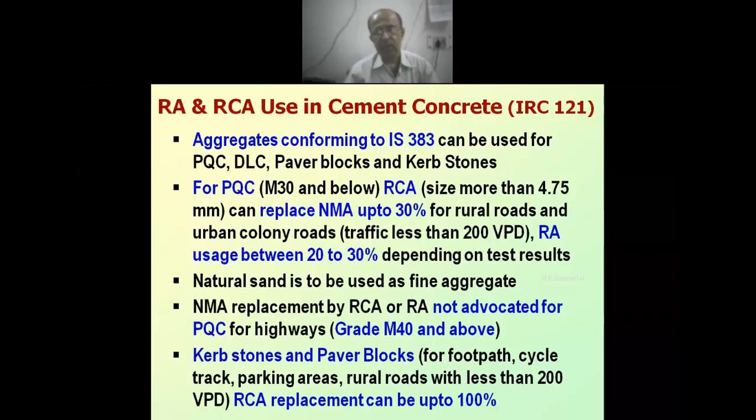Kerb stones and paver blocks for footpaths and cycle tracks, parking areas, rural roads with less than 200 vehicles per day: RCA replacement can be up to 100%. Up to 30% of NMA can be replaced by RCA in DLC. Powdered C&D waste can replace 20% to 25% of natural sand in DLC and RCCP. This can be in addition to RCA or RA usage. Combined gradation of NMA and RCA should meet the specified gradation. Mix design to be carried out as per IRC for optimizing the quantities of constituents.

This I already told you. Mixing ingredients as per two-stage mixing is another important point. What is two-stage mixing? NMA, fine aggregates, RA and RCA are mixed for 60 seconds. Half of the required water is added and mixed for 60 seconds in stage 1. Then the cement is added and mixed for 30 seconds. The remaining water is then added and mixed for 120 seconds as stage 2. This stage-wise mixing of aggregates and water is the two-stage mixing.

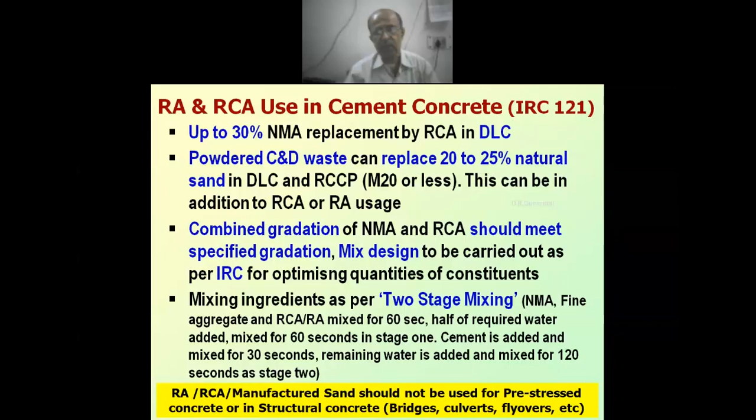The importance of two-stage mixing is that whatever RA or RCA material is there will absorb water. That's why you first mix it with the natural aggregate, put some water and mix it, then add cement and the remaining water and mix it. RA and RCA should not be used in structural concrete, but generally for PSC or bridge structures, the IRC code says please don't use C&D based aggregate.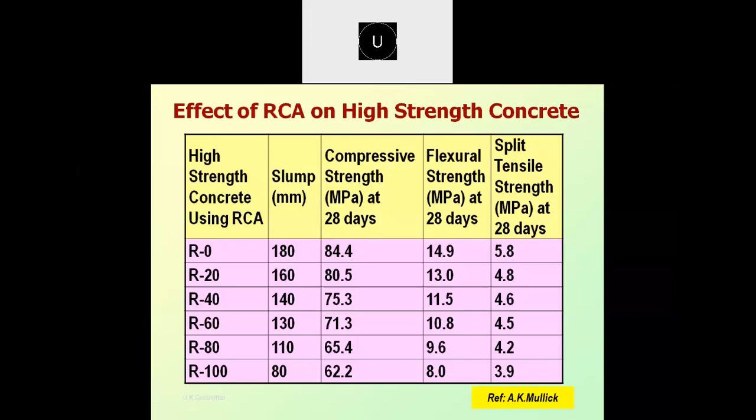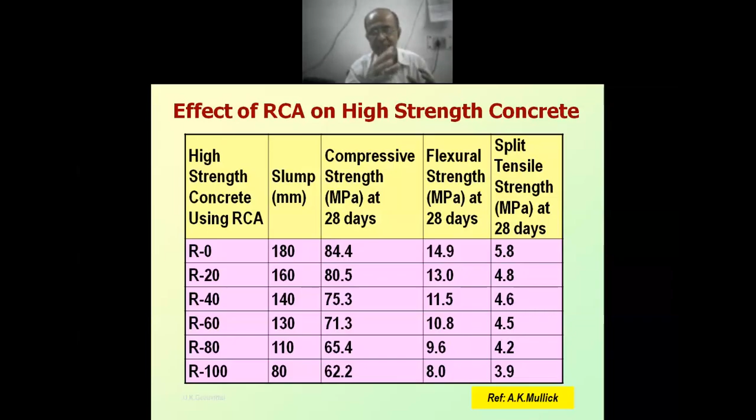Here also he has replaced even up to 100%, and compressive strengths, these are all for high strength concrete. You can see the flexural strengths are quite okay, quite good. The basic point I want to make is: do the right type of mix design. Even with C&D waste aggregate replacement, you can get higher strength.

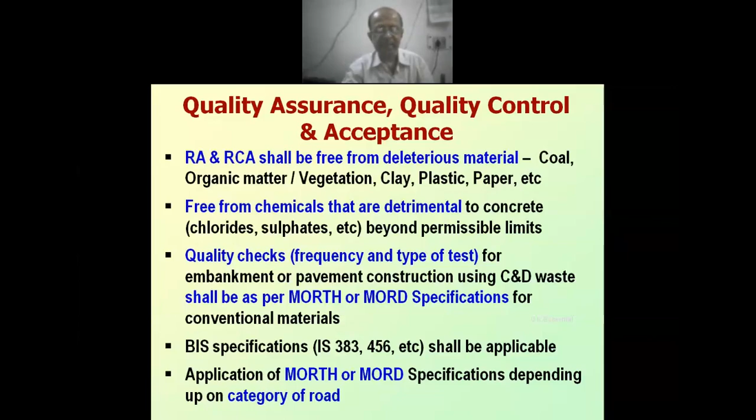Application of MoRD and MoRTH specification depending upon the category of the road. If you are constructing a rural road, we do the quality control test as per the MoRD specification. If you are constructing a highway, we do it as per MoRTH.

So some case studies. So this is a C&D based processing plant set up in Delhi at Burari. It is a PPP project, public-private partnership. And this is a crushing unit there. And that was a mobile unit initially they had set up, then they set up the entire plant, and how that plant looks like and all.

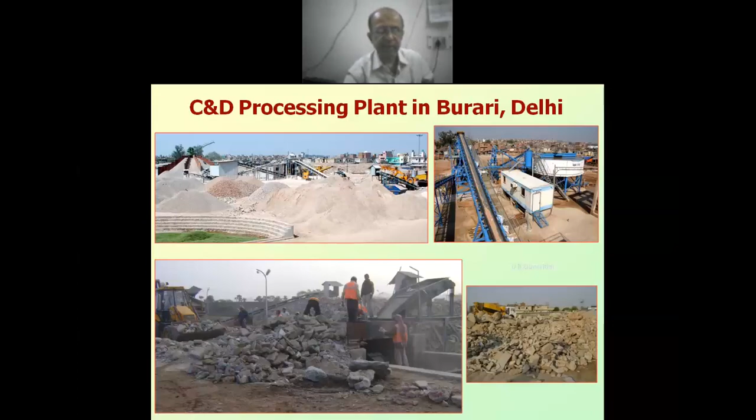You can see that. So they are preparing the RCA material from concrete blocks, and when the RA is getting crushed, they are making some manufactured sand also, because they are washing that crushed material. And this type of building blocks also, and the kerb stones and paver blocks also they are making.

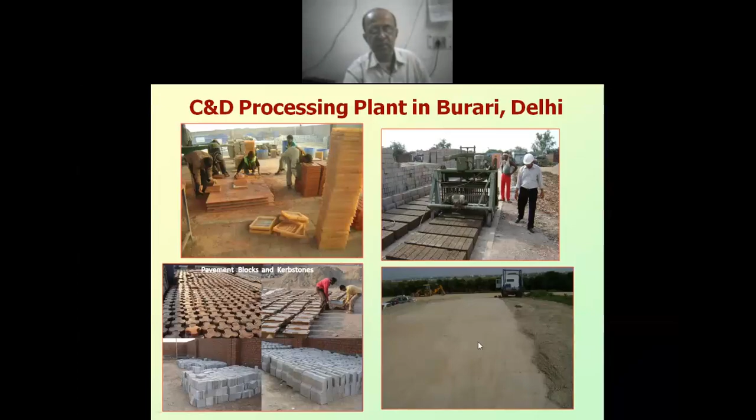These are the kerb stones they made using the RCA replacement, and they made a cement concrete road also, just the approach road to that plant, very small. Very heavy trucks carrying the C&D waste were plying on this road, but even then you can see it is performing quite well.

And the MCD, the Municipal Corporation of Delhi, wanted to widen the road nearby in Burari area, and they did the widening by using the C&D waste. So for the GSB layer, they used C&D waste, and for the base course, they used cement stabilized C&D waste, and of course there was one crack relief layer of G3.

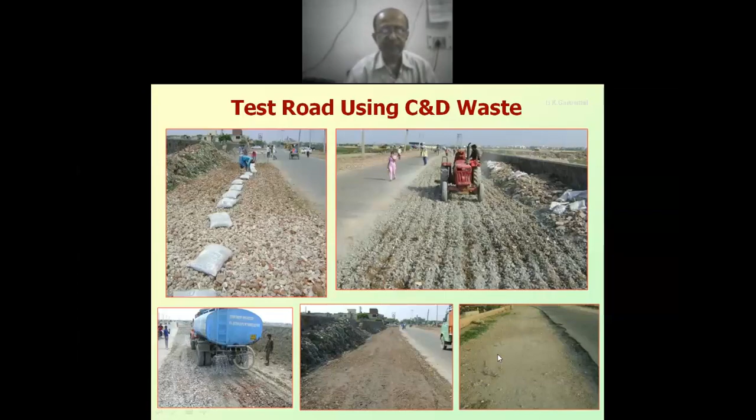Then above that, the DBM and BC layer was the same, and these are some photographs of that construction. Cement stabilization for the base course layer. So they have placed the cement bags, opened it, spread it, and they are mixing water. Then after compaction and curing, you can see the stabilized base course there. It's having a very good strength.

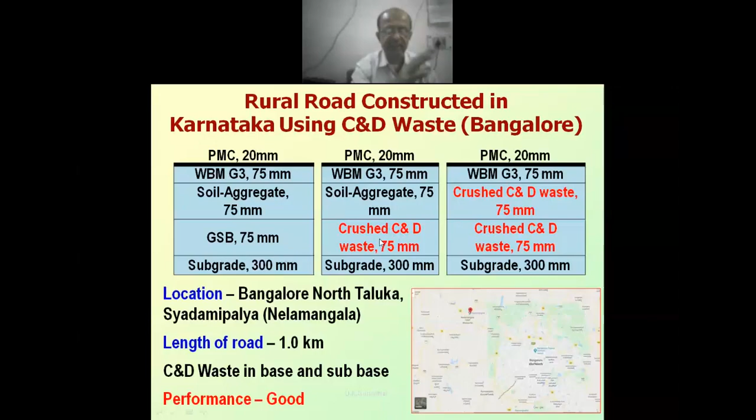In Karnataka also, KRRDA, Karnataka Rural Road Development Agency, near to Bangalore city, constructed one rural road using C&D waste from Bangalore. The conventional specification and the C&D waste in the sub-base layer as well as base layer. So they constructed three different stretches. Total length was 1 kilometer, with three different stretches.

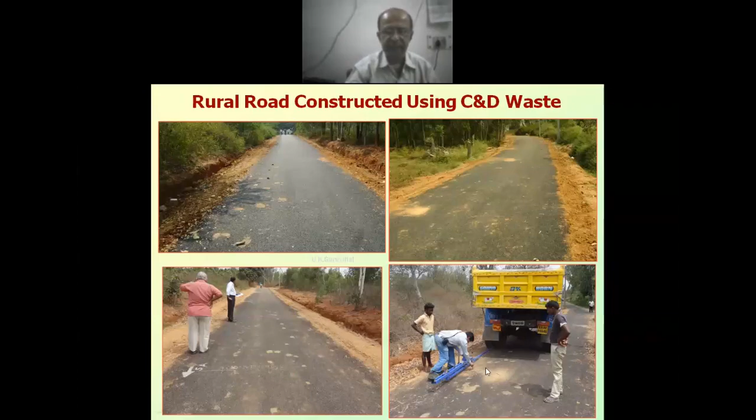You can see the photographs of that rural road. It was for a very small habitation area, under the Mukhyamantri Gram Sadak Yojana, not the Pradhan Mantri Gram Sadak Yojana. Around 100 or 150 was the population of the small hamlet, and they connected it by this road. And we did Benkelman beam studies also, how much deflection is there, and it was all comparatively okay.

Then the DDA, Delhi Development Authority, constructed another 4-lane road in West Delhi, near a place called Bakkarwala, connecting Bakkarwala to NH10. There they used C&D waste in a large quantity because slushy ground was there. So they required some ground improvement measure.

Whatever slushy soil or muck was there was removed and replaced by this C&D waste, because otherwise that slush and muck was detrimental for the 4-lane road construction. So it was replaced by crushed C&D waste. These are some photographs doing field testing, SPT test and plate load test. This is how that area was, slushy, very high water table.

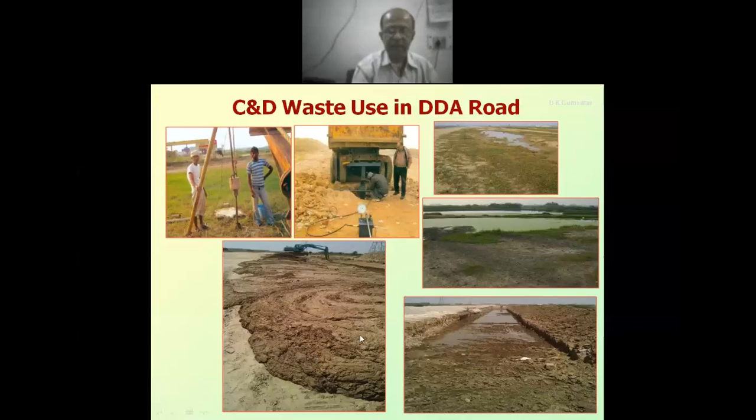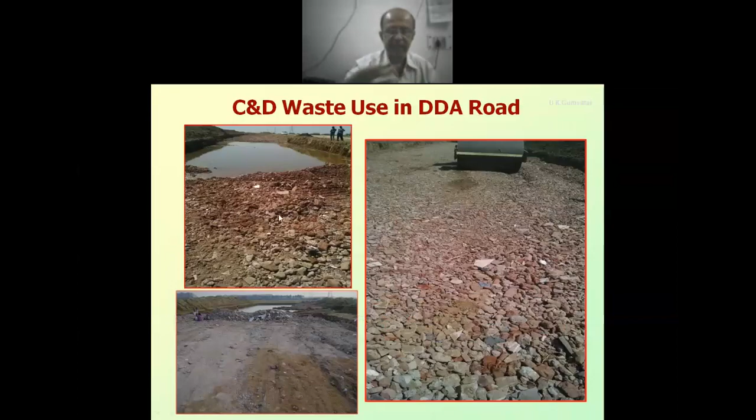So conclusions: C&D waste has marginally lower strength value and may be used as a component in GSB layer. Cement stabilized C&D waste can be used to replace part of the subbase or the base course depending upon the compressive strength.

It can be used for embankment construction after crushing, with side slopes to be protected, and in the GSB layer, stabilized base and base, but it is not advocated for the bituminous layer. We cannot use C&D waste in the bituminous layer because it will absorb more bitumen. Instead of 5.5% optimum bitumen content, it may increase to 6.5%, so that will be uneconomic. Another is that the coating of bitumen will not be proper; some aggregate may not be coated properly all over.

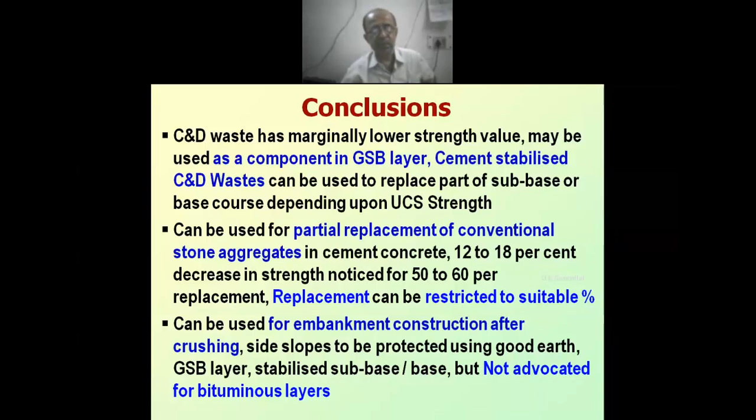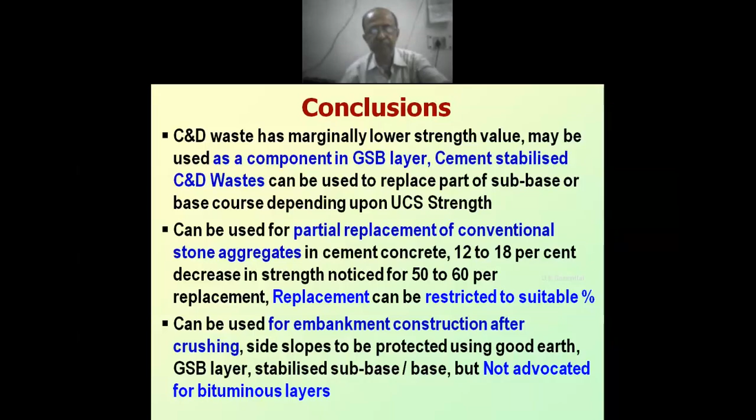So these are some important points with regard to C&D waste I wanted to tell you. Now I think we have run out of time exactly, so let me conclude here. If you have any doubts, you can ask. So these were the important issues I wanted to discuss with regard to using C&D waste, and there are no comments in the comment box. Any participants, if you want to ask, right now you can ask.

Hello. You have mentioned that generally we can use it in rural roads only. Can we use it, sir, in urban areas also by increasing the thickness of the GSB? Yes, we can definitely use it in urban areas also. I showed you a case study where the Municipal Corporation of Delhi used it for widening of a city road.

Of course, in urban areas, not all roads will be subjected to high traffic. In colony roads the traffic density will be much lower. Only on trunk routes and main urban arteries will traffic be very high, and the majority of roads will be colony roads. So in colony roads we can definitely use this C&D waste material. Even for highway works and arterial roads we can use C&D waste.